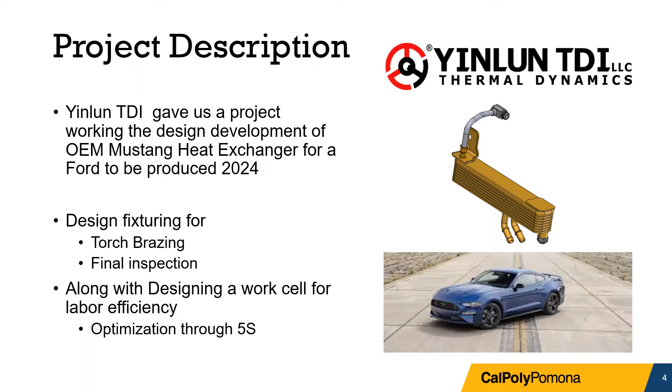Project description. Yinlun TDI gave us a project working on the design and development of an OEM Mustang heat exchanger for a Ford vehicle to be produced in 2024, shown in the picture to the right. They wanted us to design fixturing for torch brazing operations compatible with the equipment they already own to save cost. They also wanted a fixture for go-no-go final inspection gauging, along with designing a work cell for increased labor efficiency through 5S.

Project description continued. The project we worked on is still in the planning stage and is expected to begin development in 2024. This did mean that parameters of project design would be flexible and could be changed at a later time, but having this limited information of what the company was planning also made it difficult at times.

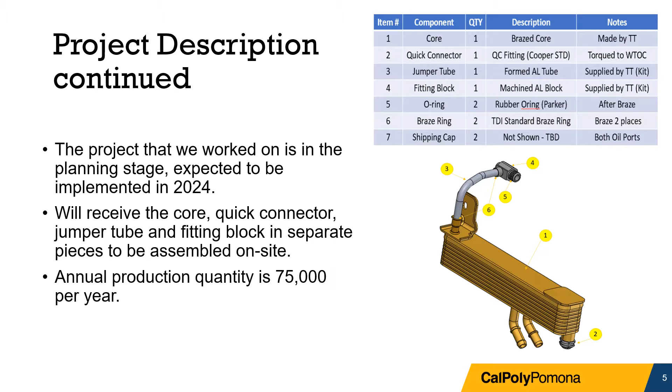Project sequence. This was the timeline for our project sequence. Step 1, research facility layout and processes and machinery the company had available. Step 2, research different brazing methods. Step 3, design fixturing for brazing and go-no-go final inspection. Step 4, investigate ways to improve work cell for optimized 5S and improved labor efficiency.

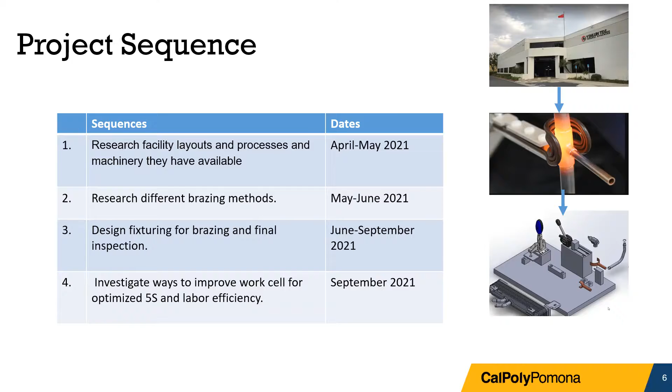Yinlun facility. We visited their Ontario facility to investigate what equipment they had available, the layout of the work floor, the work cells that they had set up, and the distance between operations. Unfortunately, at the time of our arrival, the equipment was not set up to operate and was lacking in overall maintenance, but the company's plan was to refurbish it before production so that it would be operable for their process.

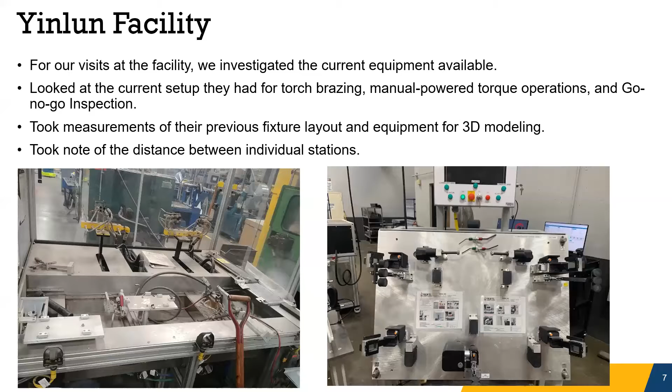Their brazing and go-no-go inspection fixtures did give us a direction to lead our design process for creating our own fixtures. We planned to model the brazing workstation with our part designs that would allow us to see the clearances between the automated pathway of their equipment and the fixture position.

Continuing on with the project, we came across some issues on deciding what brazing method to use. The ones we considered were torch brazing, furnace brazing, and induction brazing. We compared and contrasted these 3 brazing methods.

The heat source for torch brazing is oxy-fuel gas. However, it is difficult to control and requires skilled labor, and it is for continuous parts. However, it does come with a larger heat affected zone. The average cycle time is 30 seconds.

As compared to furnace brazing, where it requires no skilled labor and is for batch parts or continuous parts, and it is heated uniformly. The average cycle time is 50 seconds.

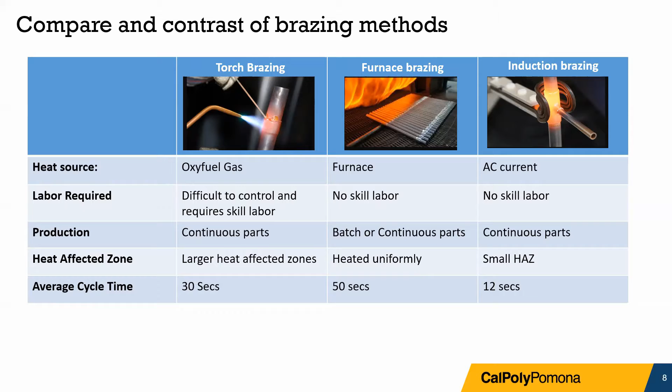Lastly, for induction brazing, the heat source is AC current and requires no skilled labor and is for continuous parts, and it does come with a smaller heat affected zone. The average cycle time is 12 seconds.

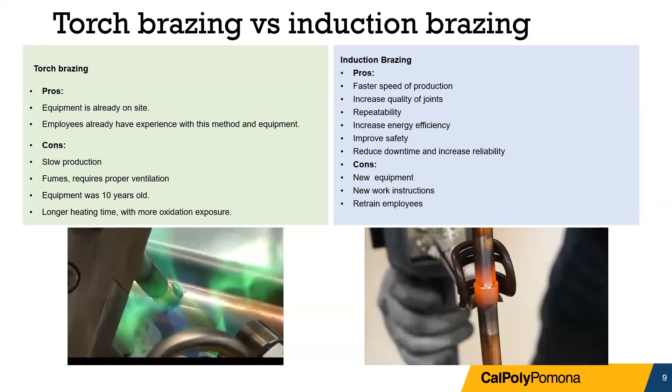We then began to list the pros and cons of torch brazing and induction brazing. Some of the pros for torch brazing was equipment is already on site, employees already have experience with this method and equipment. However, some of the cons is slow production, and it comes with fumes and requires proper ventilation, and the equipment is 10 years old and it has a longer heating time with more exposure to oxidation.

Some of the pros for induction brazing is faster speed of production, increased quality of joints repeatability, increased energy efficiency, improved safety, and reduced downtime and increased reliability. Some of the cons is having to purchase new equipment, having to establish new work instructions, and retrain the employees.

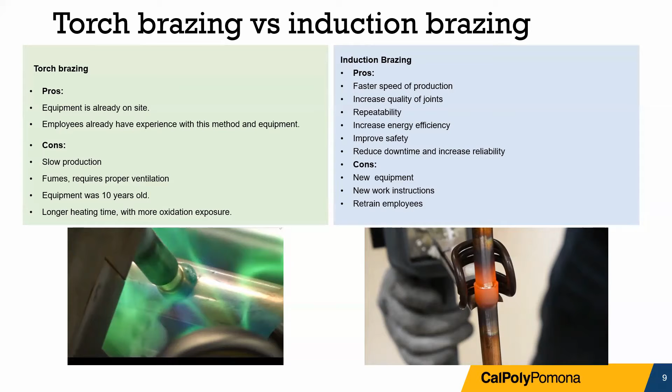At this point in the project, the company did not have a finalized cooler design for their assembly, so they sent us 2 versions that they had up for consideration.

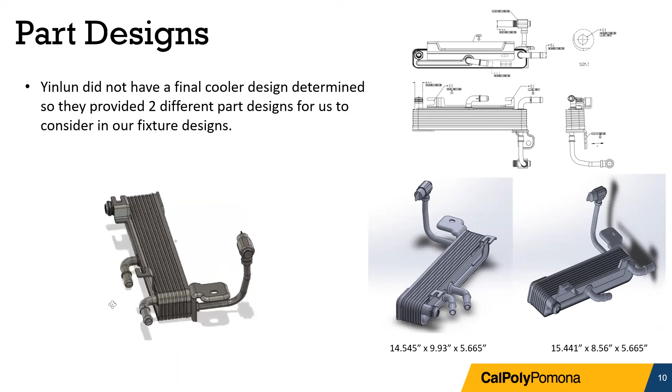Our initial approach to the project was to provide what the company requested, a fixture design for the part that would be compatible with their current equipment. This posed some challenges, both in design and in creating a time-efficient cycle that could be done with one worker. The reason was that the part geometry would require 2 brazing operations due to the different elevations of the brazing locations. We considered that we could design a fixture with adjustable height so that both brazings could be done with one setup. This would save some time.

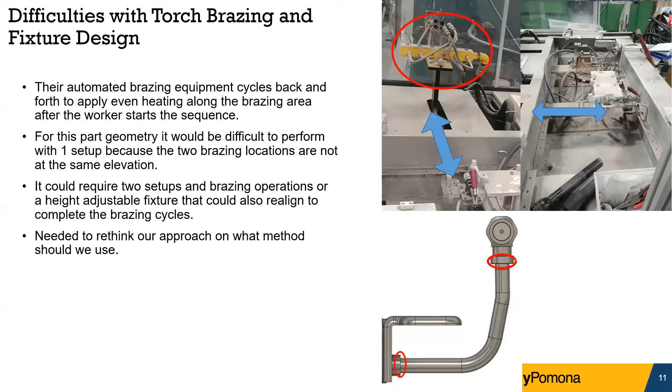Although it sounded like a good idea, we decided to try a different approach instead by changing the brazing method to one that would allow us to perform the 2 brazing operations simultaneously.

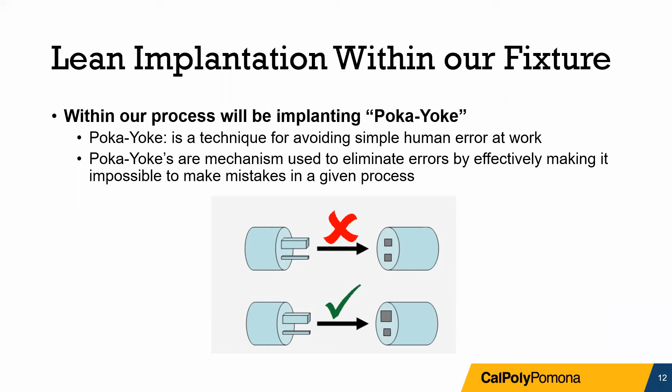When designing the fixturing, we wanted the setup to be quick, easy, and clean. One of the lean elements we used was a concept known as poka-yoke. Poka-yoke is a technique to error-proof a process. We would do this by ensuring that our parts must be in the proper locations for the braze to take place. To do this, we used a series of positioning blocks and clamps to hold the core, jumper tube, and fitting block together. Here's a video of how an operator might put the assembly together to braze.

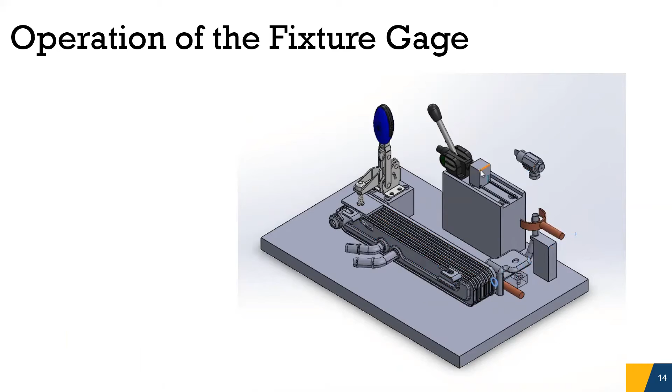First, the operator will place the core on the base plate and slide it against the 2 positioning blocks and secure it in place with a blue clamp. Next, the operator would insert the preforms onto the jumper tube and slide it into place. Then, the operator would engage the top clamp and place the fitting block onto the rail.

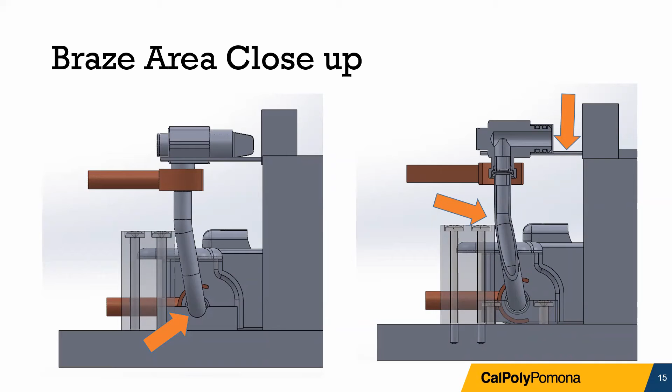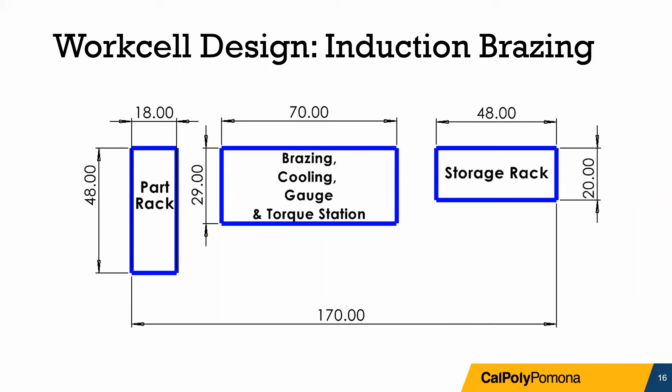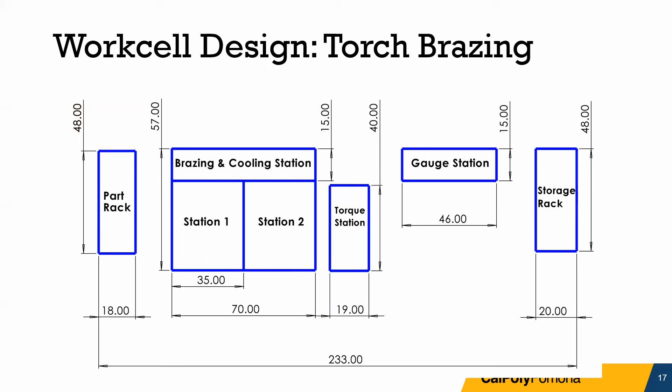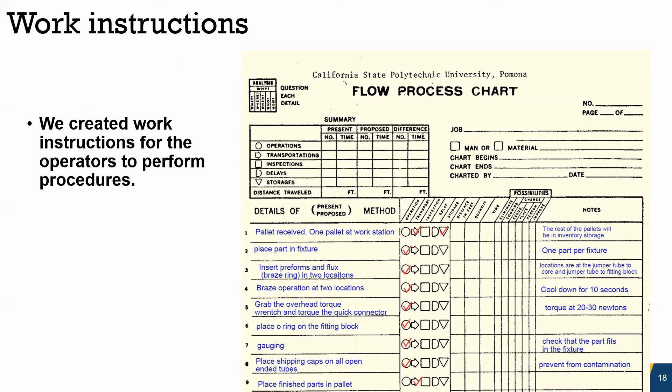And our work instructions are indicated on this flow process chart. As you can see, we start with the pallets received, and we work our way all the way through brazing, gauging operations, and then we end up shipping the product.

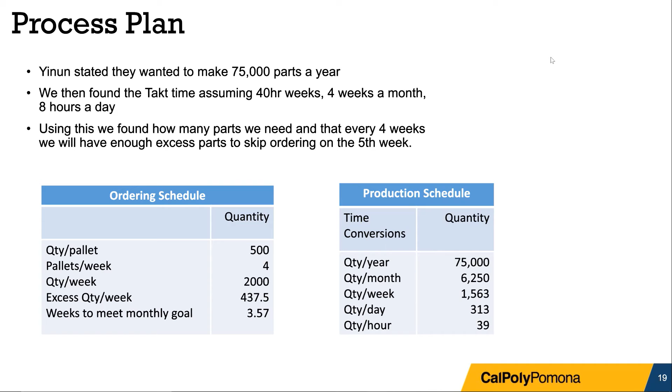Our process plan will accommodate the 75,000 unit annual demand. Daily production is set to produce 313 units a day. Our ordering schedule is on a weekly basis, and we will order 2,000 parts each week.

We use ProModel to simulate the 2 different processes. The model on the left shows their current proposed method, where Yinlun would torch braze the parts using 2 operators. They would unpack the parts, set them to braze the jumper tube to the core, and then move them to a second braze location to braze the fitting block onto the jumper tube.

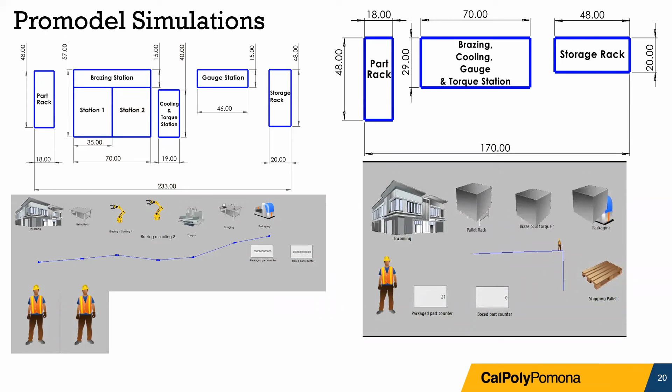The model on the right shows our proposed setup using induction brazing. And as shown before, all the assembly operations occur in one location and with one operator. We went with induction brazing as it was the cleanest, fastest method.

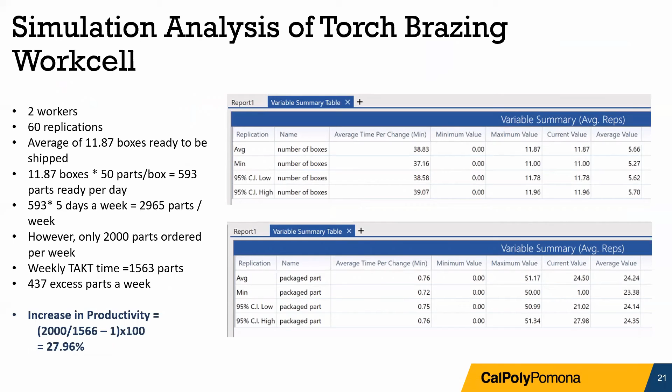We simulated 60 replications to simulate 2 months worth of work to ensure a minimum number of boxes can be reliably made. For torch brazing, we had on average 11.87 boxes, which would make 593 parts per day and 2,965 parts per week. However, we only order in 2,000 parts per week, meaning we would be overproducing 437 parts. Our excess parts can be stored, and every 4 weeks, we will have enough extra parts made to skip a week of production. Torch brazing has an increase in productivity of about 28%.

For induction brazing, we have on average 6.82 boxes per day, which is 1,700 parts per week, meeting our weekly takt time of 1,563 parts. This leaves 142 parts excess a week, which allows us to have enough excess parts made to skip our pallet order for the 12th week, and an increase in productivity of about 9%.

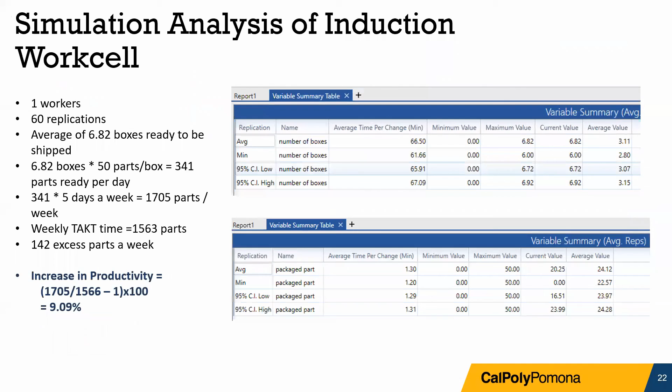Although induction brazing has a lower increase in productivity, it meets the takt time while using fewer employees and reduces overproduction. The economic analysis compared the two different brazing methods.

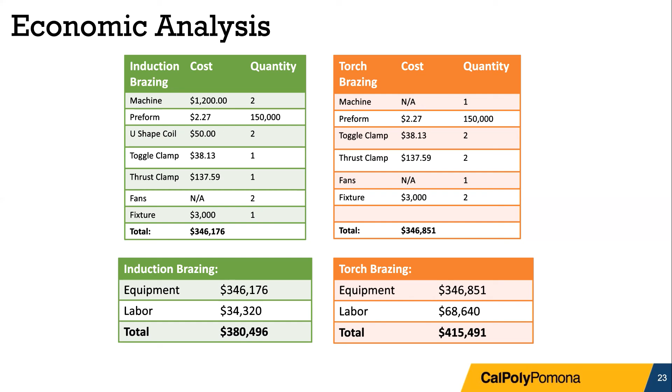As time progresses, induction brazing will continue to be a smart decision economically, as torch's annual compounded costs increase at a faster rate.